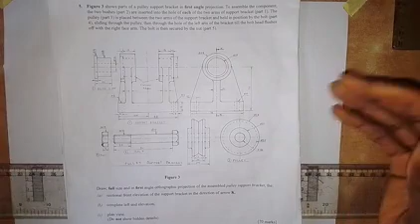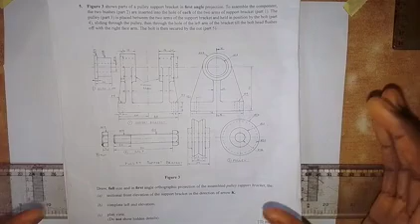Welcome to my channel, where we are going to be working on this mechanical problem. What I'm going to do specifically in this video is produce the section of the individual components. I'm going to work on the sectional view of each individual component. Then I will also make a video for assembling the parts together, as you see, but currently I'll be drawing the individual sectional view of each one of them.

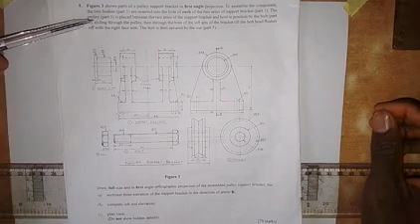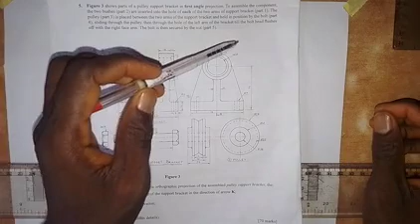Now let me read the question that we have here. It says figure 3 shows part of a pulley support bracket in first angle projection. To assemble the component, the two bushes, part 2, are inserted into the hole of each of the two arms of the support bracket, part 1. The pulley, part 3, is placed between the two arms of the support bracket and held in position by the bolt, part 4, sliding through the pulley, then through the hole of the left arm of the bracket till the bolt head flushes off with the right face arm. The bolt is then secured by the nut, part 5. So that is what we have here.

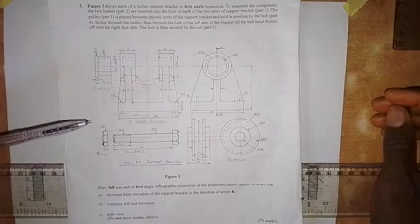So part 1, this is part 1. Then we have the bush to be part 2, though there are two bushes - one entering here and the other entering here. Then we have part 3, which is the pulley, part 4 is the bolt, and part 5 is the nut. So those are the components that we have.

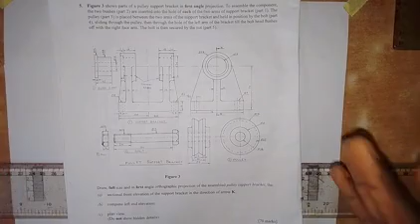As I said, in this video what I'm going to do is produce the sectional view of the individual component, and later we assemble them together. So let's go and see how we can make the individual sectional view of each of these components. I'm starting with this support arm - I'm going to draw the sectional view of this support arm, as you can see on the screen. Let's look at how it will be.

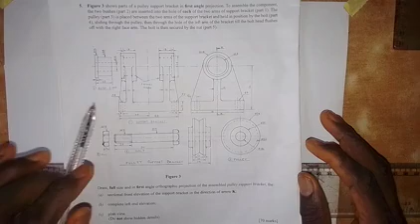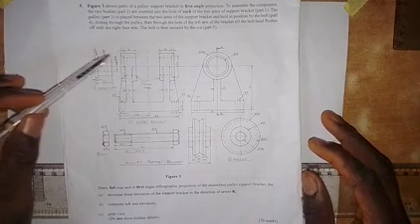Distance from here to here is 88, and from here to the center is 44. Then the thickness of this is 10, and from here to here is 22, as we have 18 plus 4, that is 22. Then the distance from here to here is given on the end elevation as 48 millimeters. Then this part here, the distance from here to here is given in the end elevation as 28. Then we have the diameter of this hole, though that is within this, so we are not going to work with that. But for this part, from here to here we have it to be 36, as we have here.

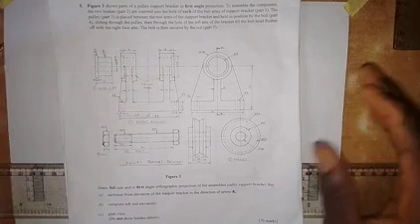So that is what we are going to do. Let's see how we can draw the sectional view of the support arm. Let's start with that - the thickness from here to here, as given here, is 14 millimeters. So we are going to start with that. The first thing I'm going to do is draw a vertical center line, like this. So I'll put it here, here.

Alright, I'll just stop it here now. So then we are going to draw a horizontal line here. Then on this line I'm going to take 14 millimeters - don't forget we want to draw the sectional view of the support arm. So here I will draw a horizontal line like this.

Then the total length, as we have, is 88, so 88 by 2 will give us 44. So here we have this to be 44 to the left side, then we have 44 to the right side. So here we are going to draw a vertical line, and then we come here also to draw a vertical line. So that is done.

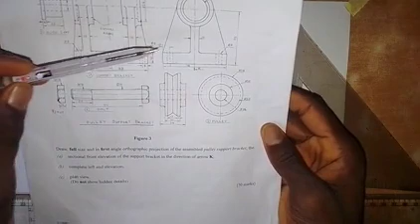The next thing I'm going to do is take the height. So the height from here to here to this center line is 72. So I will take a measurement of 72 right from the base, right from this part - so 72 up. So here we have 72 millimeters. So I'm going to draw a horizontal center line here, like this.

Now the space in between this support arm is given here on the pulley, which is 34 millimeters, because the pulley is to occupy this space. So the thickness from here to here is 34. So I'm going to take a measurement of 17, 34 by 2 - 17 millimeters to the left side, and 17 millimeters to the right side, so making 34.

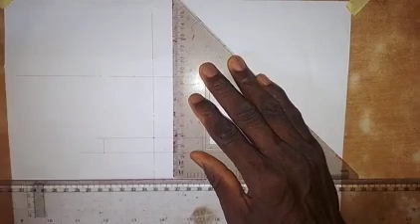So here I'm going to draw a vertical line. I will take a vertical line here like this, and then I will come here and draw another vertical line.

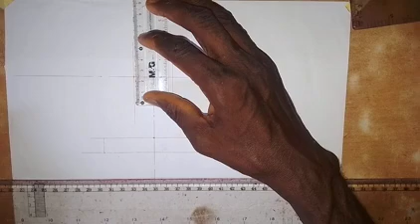Then another thing I'm going to draw here, for the distance from here to here, as you can see, it is 48. So 48 by 2 gives us 24 millimeters. So I'm going to take 24 millimeters up and 24 millimeters down to make it 48.

Okay, so here I'm going to draw a horizontal line up here, like this. Then I will come down here and draw another horizontal line.

Alright, now I'm going to take the width of each of these. From here to here is 22 - that is 18 plus 4, which equals 22. So I'll come to this point and take 22 millimeters to the left side, then from here I'll take 22 millimeters to the right side.

Then I'm going to draw a vertical line. I need to extend this horizontal line a bit to the right side. Okay, so we have this. Then I'm going to draw a vertical line down. Okay, then coming to this side, I will draw another vertical line.

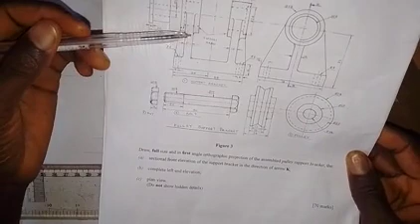So let's produce this part here, which is 10 millimeters, and this is also in the middle of that 22 millimeters that we took. So if I divide 22 by 2, that is 11 millimeters. I'll just take 11 millimeters here.

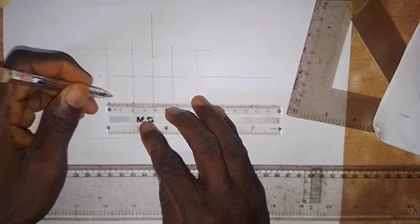Then from this point where I have 11 millimeters, I will take 5 to the left side and 5 to the right side, and repeat the same thing here, dividing this into 2, that is 11 millimeters. Then coming to this point, I will take 5 millimeters to the left side and 5 millimeters to the right side. So now I will produce that part.

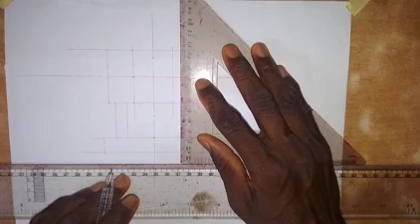So all I need to do now is draw a vertical line down here like this. Then coming here, I will draw a vertical line down like this. Then here I'm going to draw a vertical line down, and here I will also draw a vertical line down. Alright, so we have this now.

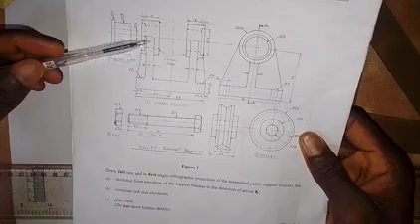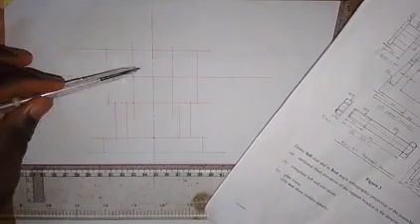So what I'm trying to do here - this part will not show, this is for the real front elevation. Now it is cut by this cutting plane, which we are working with to produce the sectional view of this component, the support bracket. So the cutting plane has cut, this part is removed. What we are to see is what we want to produce here as the interior part of this component.

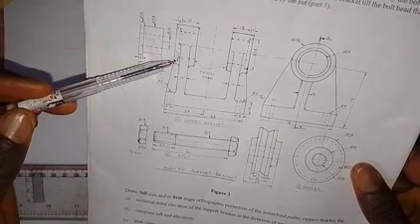Let me bring it up. So this part that we have here, I need to create it. The distance from here to here, as given in the end elevation, is 28 millimeters - that is diameter. And from here to here is 36 millimeters, as given here. While in the end elevation, this hidden part from here to here is 28 millimeters.

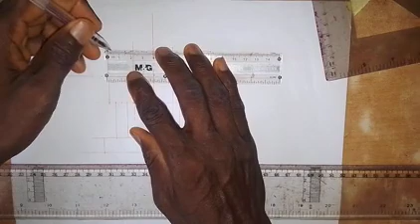What I'm going to do now is come to this center, and divide 36 by 2. But before that, let me take a measurement of 4 millimeters from here at this point. Then I will come here and take 4 millimeters from here as well, so this is 4. Let's get that done at once.

Okay, so at this 4 millimeters point, I'm going to draw a vertical line down like this. And I will come here and also draw a vertical line down. Alright, so that is done.

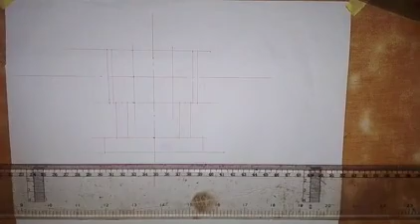Then the next thing I'm going to do is take a measurement of 36 by 2, which gives us 18. So I take 18 millimeters down here, like this. Then 18 millimeters up. So this is it.

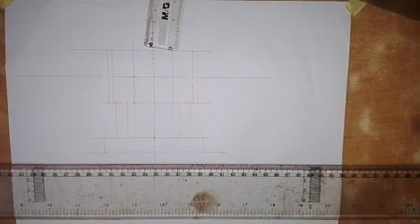So this is 18 millimeters. We have it there. Now I'll use my black pen to create that part. I'll draw this now, and then draw it here too. It also goes to this part, so at once, then we come up here and draw the line here, and I'll also draw the line here.

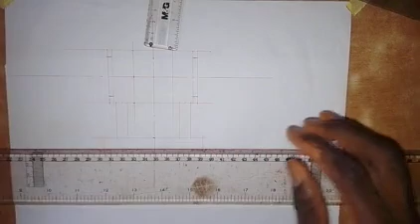The inner hole that we have, the diameter is 28, so the radius is 14. From this center line, I will take 14 millimeters down, like this. Then I will take 14 millimeters up. So this is 14 millimeters.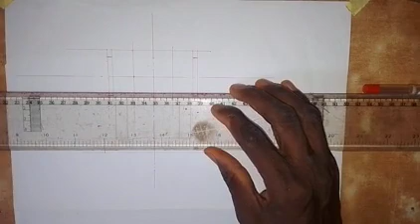Now, so what I'm going to draw here, I will take this, then draw from here to here. From here to here. Then I will also draw from here to here like this. Then coming up here, I will draw from here to here, and also from here to here.

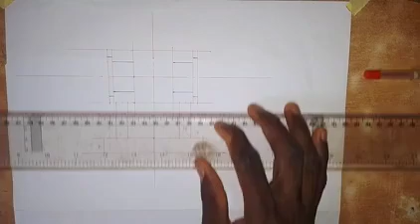So then this line, make it a thick line. Also this part, we also see it as a thick line. This also will be a thick line. Then coming here, so this will be a thick line, and this will also be a thick line from here to here. Then here also, this should be a thick line, and this is also a thick line. So within this part, this line is a thick line, all this together should be made a thick line, down to this point it's a thick line, and this also is also a thick line. So we have it like this.

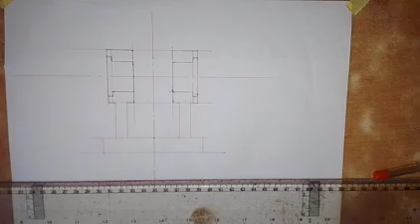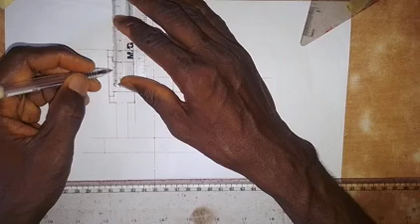Then another thing that we need to put here is this internal hole, this particular hole that we have here. It is hidden in the front elevation, and the diameter is 14 millimeters. That would be 7, the radius is 7. So we need to produce that. I will come to this point here and take a measurement of 7 millimeters down, 7 millimeters up. So this is 7 millimeters down, 7 millimeters up here, to make it 14. So all I'm to do here is make this a thick line.

We are going to see it, since we are producing the sectional view.

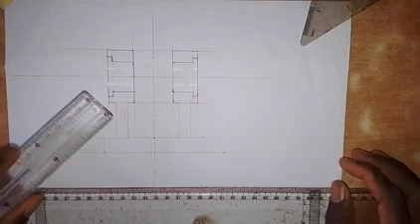The line that I just drew now, I found that we are not supposed to draw it, because that is in the bush here. So it's not supposed to be part of what we are going to see within this support arm, because we are producing the sectional view of the individual components. So that is what we are doing here, that is not supposed to be there. So I've removed it, and I need to make this line a thick line.

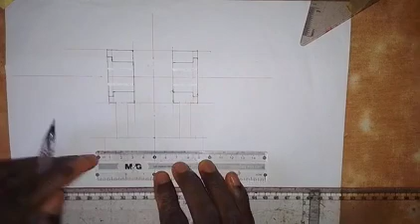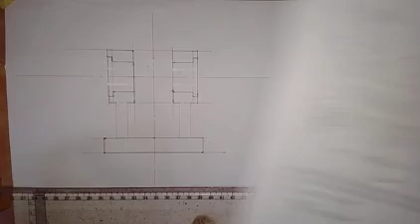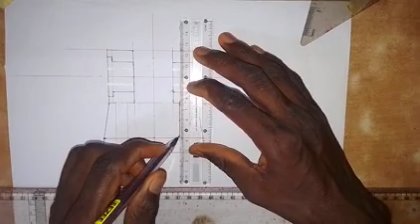So make this line a thick line from here to here, and we also make this a thick line from here to here. Then we also make this a thick line, and then make this a thick line. Then we have a web here, this is a web, and this is also a web. So we just draw from here to here, and join this together with this, like this, and we also join this together with this. Then this is going to be drawn a thick line like this, and this will also be drawn a thick line like this.

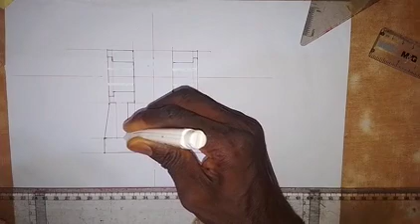There is something I need to remove here. This line is not supposed to be seen here, this line up to this point. So they are not supposed to be drawn thick, and also these are not supposed to be drawn thick. I'm not supposed to draw this line thick. So you can only have that line drawn thick in the given front elevation.

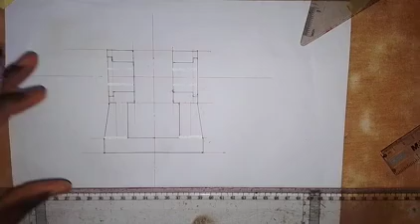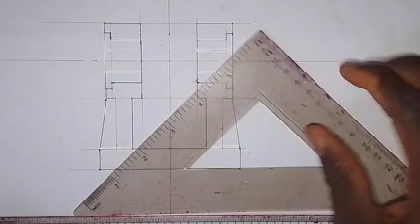So with what I've done here, I've drawn the view for the support, but we need to hash this part, we need to hash the surface. We are going to make use of our 45 degrees set square to hash it so that we can bring out the sectional view of the support arm. Let's hash the surface. Since this is just a single component, we hash together in the same direction, starting from this part, from here.

I'm going to pause the video, then go on with the action. When I'm done, I will come back and you see what I have done.

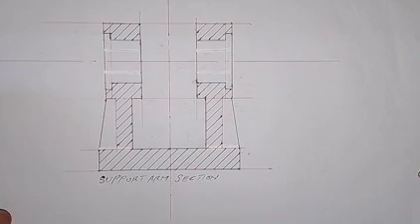As you can see, this is the sectional view of the support arm, and this is how it should look. So let's meet on that of the section of the pulley. Thank you.